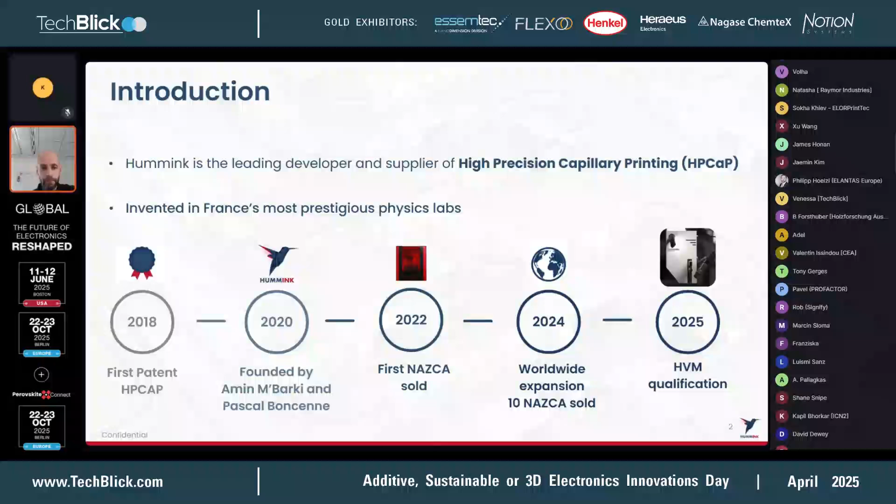So Hummink is the leading developer and supplier of high precision capillary printing, which is a technology that has been invented in 2018 in France. The company has been created in 2020, and in 2022 we sold our first tool, and today we are expanding worldwide, selling tools around the globe and trying to qualify our technology for high volume manufacturing this year. In this presentation, I'm going to present the technology itself, as well as some of its applications that some of our partners worked on the last few years in this field.

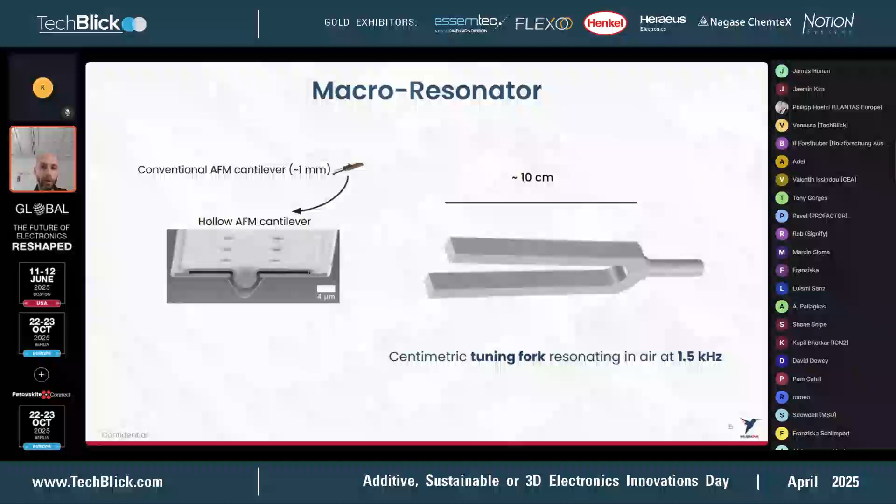Okay, so first I'm going to focus on HPCaP technology. HPCaP technology is a technology that is inspired from Atomic Force Microscopy, AFM. It differs from it because in AFM typically you have a small cantilever that vibrates and uses the frequency shift to probe a surface. Here we have a tuning fork, which is more macro, about 10 centimeters wide. And it's resonating here at 1.5 kilohertz.

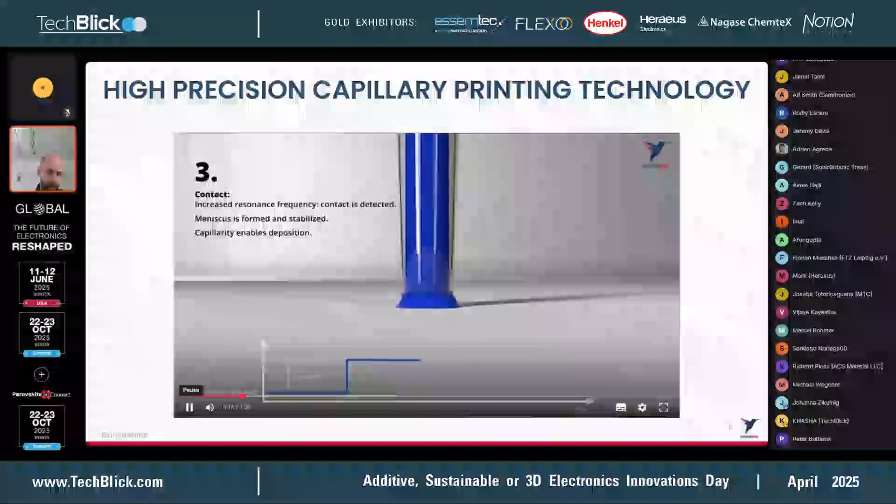I have a little video here to show the thing. We can attach a pipette on top of it, and once it vibrates and we get close to the surface, there is a frequency shift that allows us to see that we are close to the surface, and then a meniscus is going to form and create a cushion in between the pipette and the substrate, which will allow us to deposit some ink.

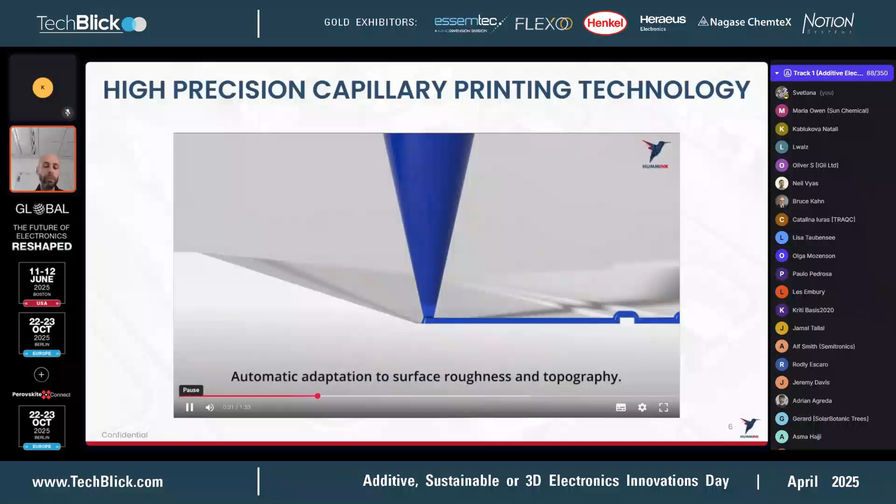We can deposit some dots like this by retracting and approaching, but also we can deposit some lines on the surface, and while we deposit a line, we keep track of the frequency, and once it shifts, it can adjust automatically to the topography of the surface, so you can deposit on the surface reactively. You can deposit any shape like this Hummink logo.

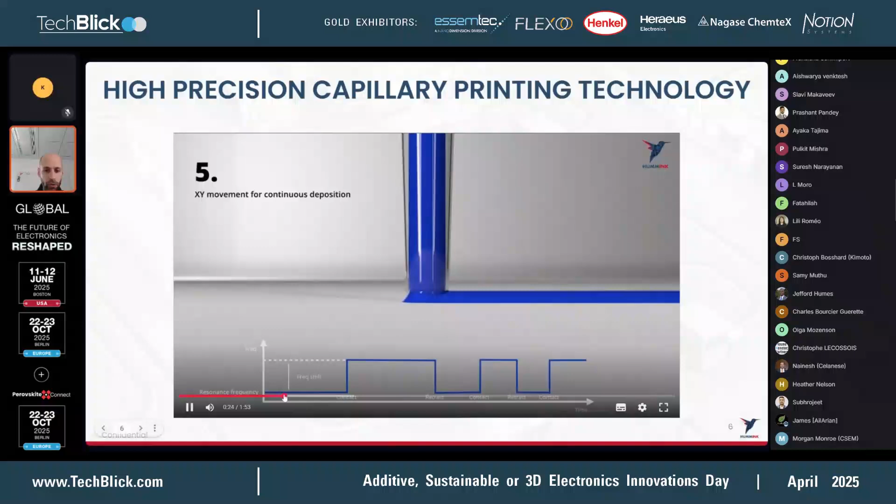Since we have a very good unique positioning precision, and like you saw, we only use the capillary force between the pipette and the substrate, we have no satellite drop. Oh, sorry. We have no satellite drop, so you can target some applications such as repairing some damaged lines in the semiconductor or display industry, like you can see here.

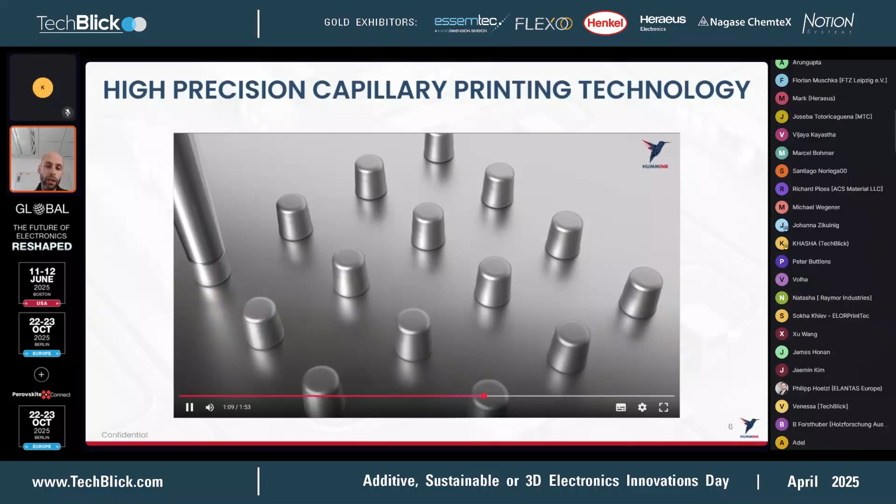We also have submicrometric precision when we are dealing with a very dense array of wires, so you can have a very precise control of the position of the pipette. You can also do some 3D structures, such as metallic pillars. We have silver, indium, and their shape can vary with an aspect ratio from 1:1 to 20:1, depending on what is required.

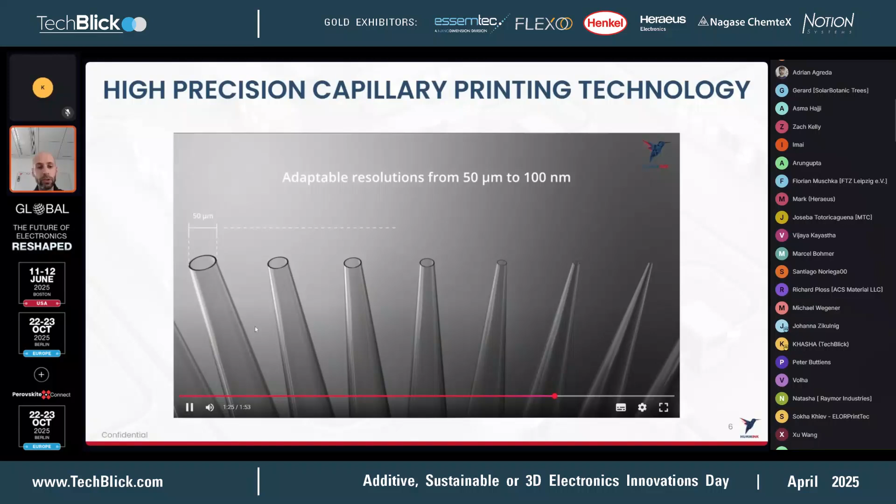The resolution achieved is dependent on the pipette we are working with. Typically, we work with pipettes ranging from 50 micrometers to 100 nanometers. So that will set the resolution that we can achieve with our technology. And we are compatible with a wide range of inks. Typically, we can deposit metals such as silver, gold or indium, but also polymers or some quantum dots as well.

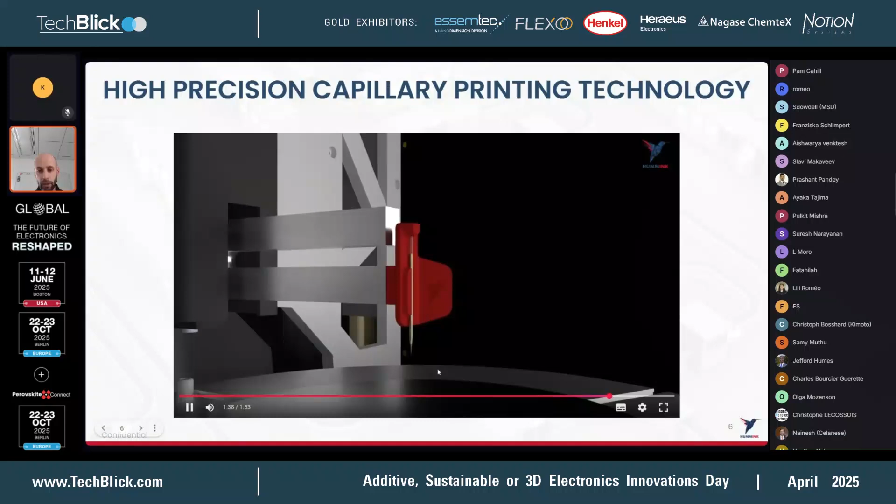We are developing right now an add-on module that can be integrated into existing OEM equipment. So that's work in progress, but we also have a tool that is more like an R&D tool, which is standalone, that you can use in any lab.

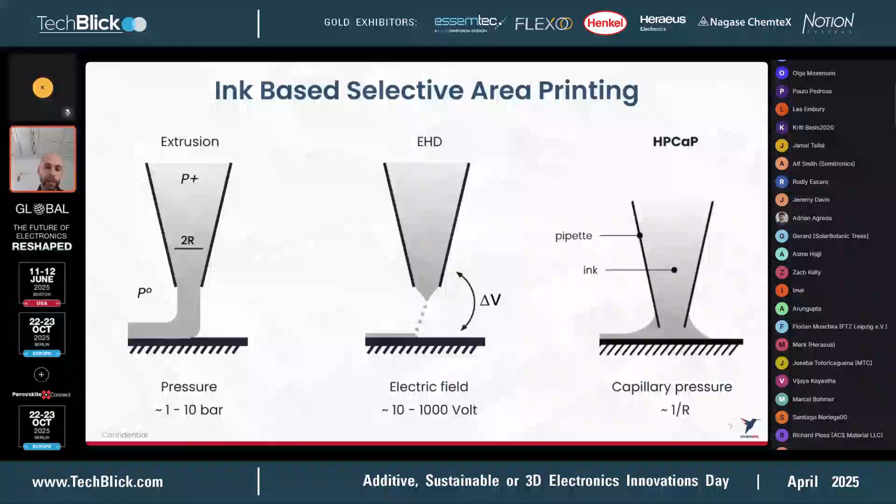So what differentiates us from other existing technologies is the fact that we are only using the capillary force between the pipette and the substrate. There is no external pressure, there is no electric field applied, so it's a very soft technology, very soft deposition on the surface. So like I mentioned, we can deposit any kind of material on any surface in any shape. And we don't make all this ink, but any ink that